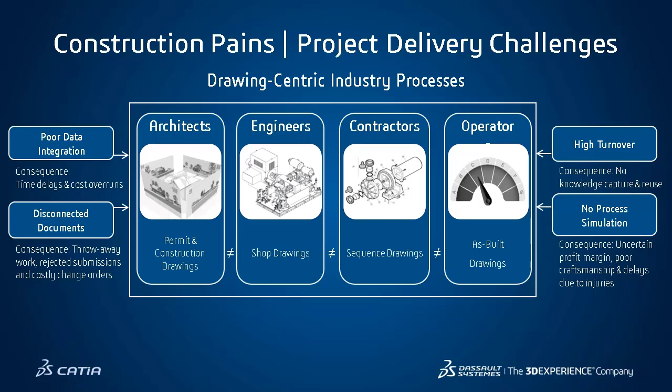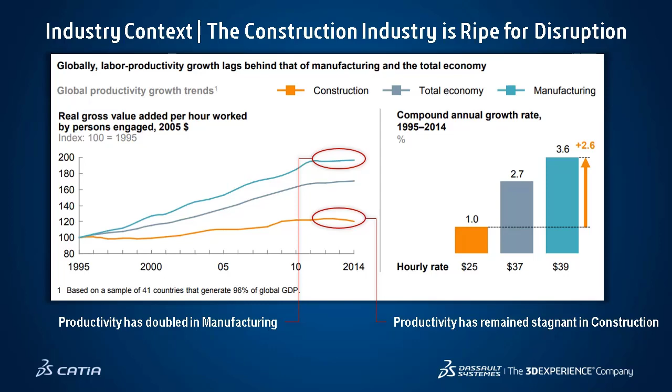Because of this, the construction industry has lagged in productivity gains over the past 20, 30 years, as the manufacturing industry has really taken advantage of the gains that you can make with automation and a 3D design process. The construction industry hasn't made that leap, and so there's a desire now, and there's a motivation to move into a more manufacturing-centric approach for construction, so that we can recoup those gains and start to make more progress.

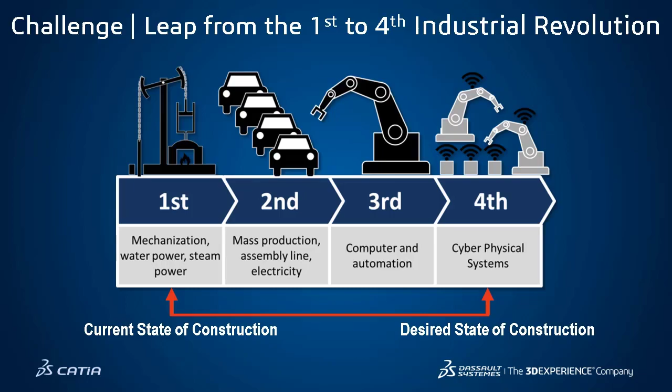And so the challenge now is to go from what I would claim the current state of construction, which is still in the very first industrial revolution of mechanization, through mass production into computer automation and eventually into cyber-physical systems, where the entire chain of construction, the entire chain of fabrication, assembly, installation can follow an automated path.

And CATIA has led this transformation in other industries. In 1981, we brought 3D design to the aerospace industry, while most architects and engineers were still drafting in 2D. And over the course of time, we've continued to deliver innovations to these industries, and the architecture, engineering, construction industry has made piecemeal improvements over time, but those remain very outlier examples.

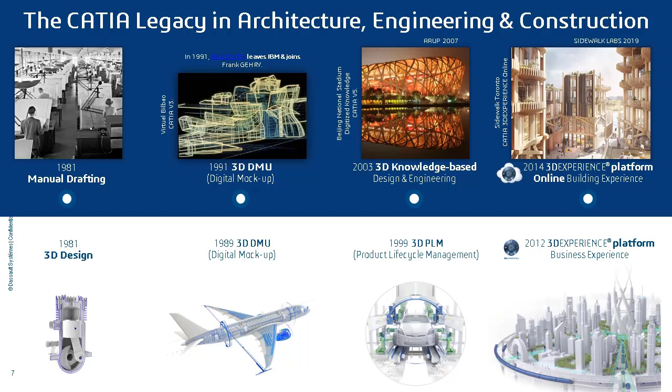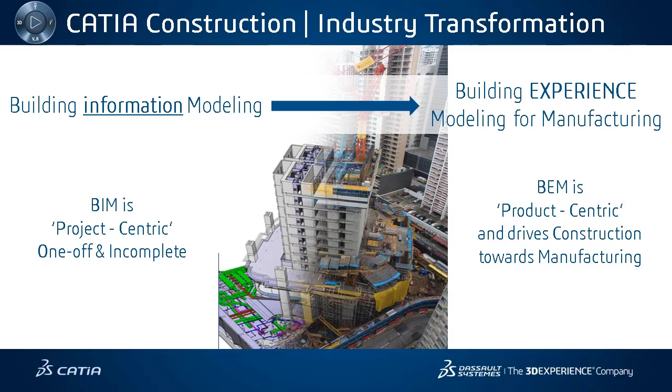And where we're going now into the future is to say that it's time to make that leap, the way the aerospace industry made the leap, the way the automotive industry made the leap. And we're proposing to go beyond the current paradigm of building information modeling into the future paradigm of building experience modeling for manufacturing, where through the use of parametric design, generative design, and template capture and reuse, we're going to bring the efficiencies found in the manufacturing processes to the construction industry.

So where do we see this going? The transition from BIM to BEM, going from fragmented processes, files and documents, manual reporting, 2D planning, into a platform-centric approach with a common data environment within the context of the city to maximize knowledge capture and reuse.

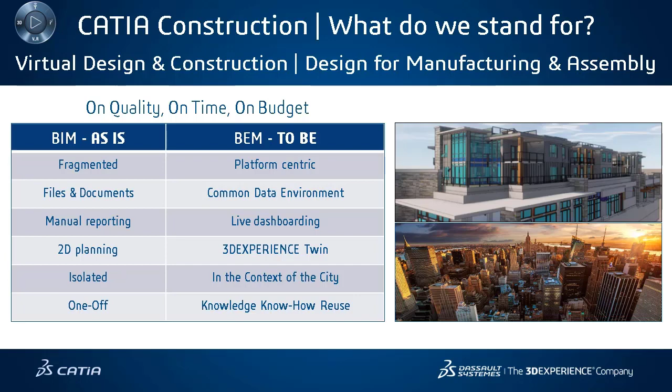And what's the difference between BIM and BEM? Well, BIM is a limited approach because it doesn't have the capacity to integrate a fully clarified, integrated systems view of a building component, of a building project. With BIM, we have an operational view, maybe a functional view, but the manufactured view, the organic view of all the different parts and pieces that go into making up that system is what's lacking. So with the power of the 3DEXPERIENCE platform, that's where we see this integrated systems view being deployed.

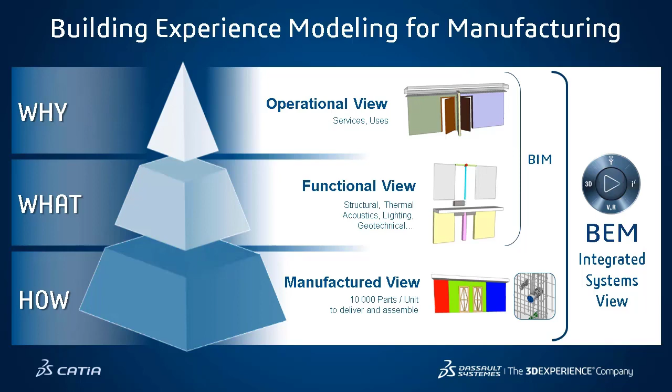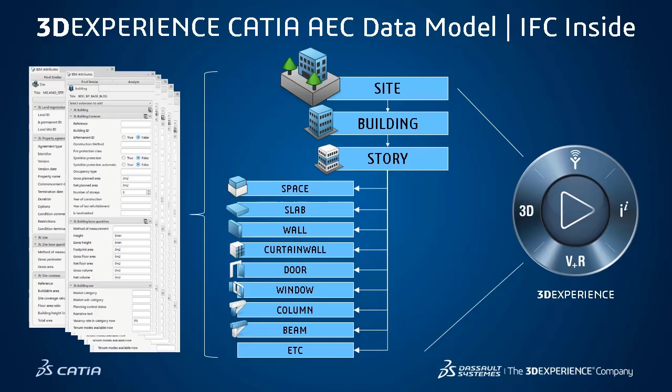And because it's on the 3DEXPERIENCE platform, it's available to everybody, sharing one common data model and one collaborative environment. That data model for us, for the construction industry, is IFC. It is interoperable. It functions across all of our applications, and it's able to deliver that industry specificity to the construction industry on the 3DEXPERIENCE platform.

So for CATIA specifically, we have a portfolio of roles, and those roles are focused on delivering a continuous level of development so that designers who don't need a high level of detail can be working in a conceptual model, but that model can be directly linked with the manufactured components and the highly detailed models that include all the information required for fabrication with the click of a button.

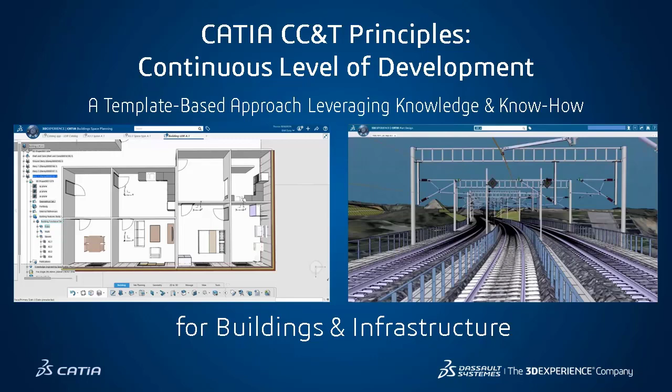And we have two focuses, one on buildings, one on infrastructure. Today I'm going to focus mostly on buildings, but if you'd like more information about our solutions for infrastructure, reach out and we can provide any information that you'd like. So just quickly, an overview of the role portfolio, because it's changed in the last 2 months.

What you see here is the new 21X role portfolio. Prior to this, it was similar but slightly different. Roles are commercial packages of applications. So it's what a user buys, it's what a user uses to deliver a construction project. And we have a portfolio of roles that go from architecture and buildings to infrastructure for roads and rails and civil infrastructure projects. And a dedicated portion for systems, mechanical, electrical, plumbing, and fire, and coordination and presentation.

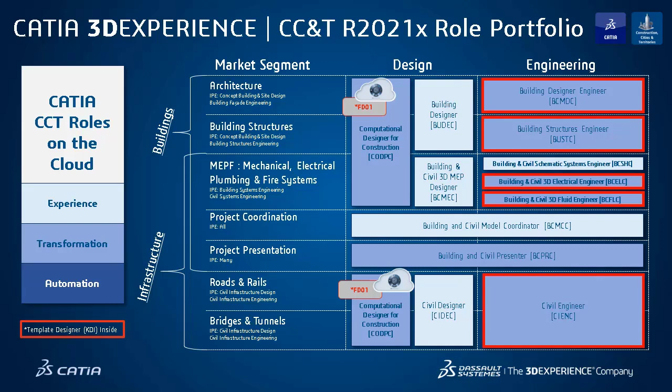These roles are then grouped to deliver processes. These processes are something that a department within a company is going to do, and those processes then make up what we call an industry solution experience. This is a look at creative building design and the processes and roles within that solution: civil infrastructure engineering, integrated built environment, and then the global portfolio of industry solution experiences for the construction, cities and territories industry in 2020.

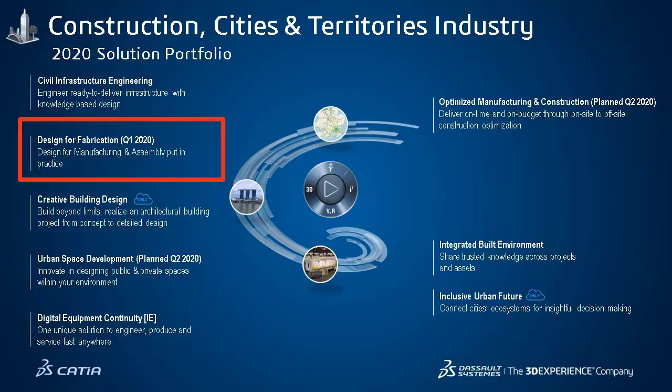We're going to focus on design for fabrication as we look at how and why we're delivering generative design for modular construction. In this case, we're going to look at a partnership that was signed recently with AIDEN. AIDEN is a global facilities management group that's headquartered in Shanghai. And we're working with them to develop something called a KillaCare, which is an innovative solution to deliver turnkey construction projects. And what we're going to show here is the result of the COVID crisis and how the urgent need for hospital beds in China has pushed AIDEN to develop this system to deliver smart and connected hospital beds.

What I'm going to show here is really the proof of concept that kicked it all off and led us down the path to develop this system, which is going to go beyond the COVID crisis. It's going to extend into other countries around the world to deliver not just hospitals, but other construction projects for all different kinds of uses. And so the business benefits here are to reduce delivery time, to reduce errors and costs, to meet the local government standards, to optimize the human environment and to maximize operational efficiencies.

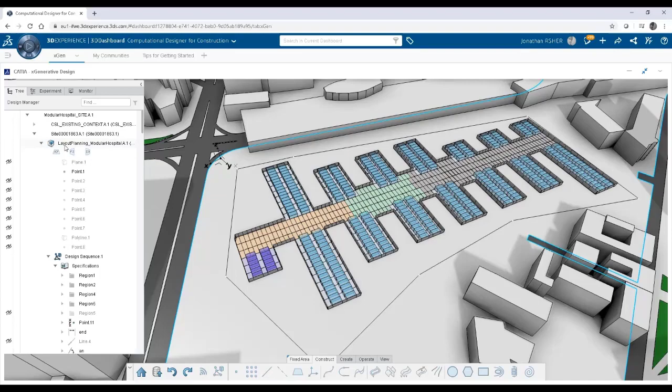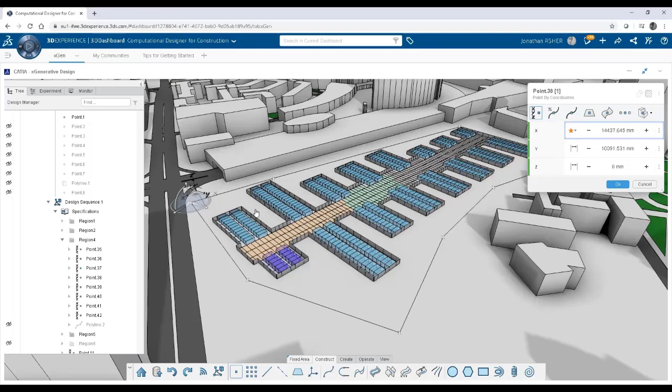xGenerative Design is a web application that runs on the 3D Experience dashboard. And here we've developed an intelligent generative algorithm to do space planning and to lay out hospital beds based on a site condition. So in this case, we have a site boundary. That's the maximum buildable site. We've laid out our units, and by manipulating the boundary conditions and a number of parameters that we've established as important driving parameters, we can modify the layout and see how the resulting spaces match the requirements for the project that we're going to be building.

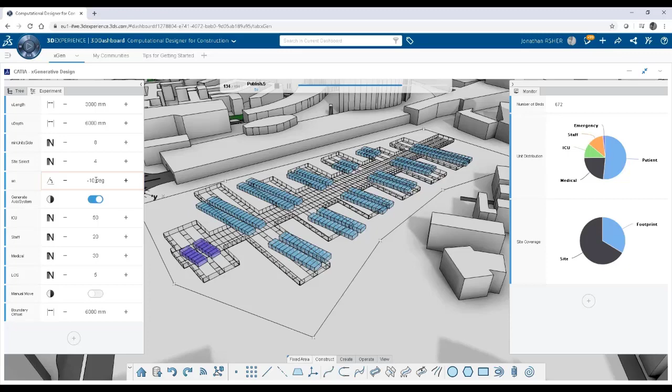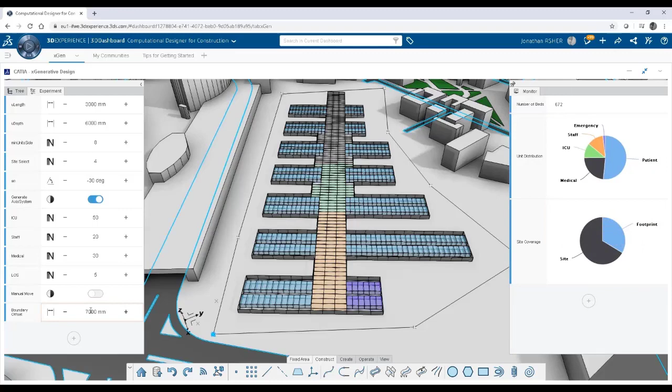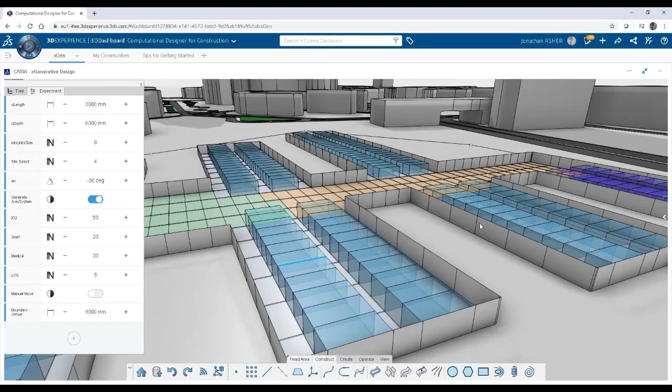And so some examples of the parameters that we've decided to manipulate to control our model, say the angle here. We have the offset, the maximum offset of the boundary. We have the different distribution of spaces. So what is the distribution of staff rooms versus medical rooms? And the resulting KPIs of each of our design variations are being captured in the monitors tab. The monitors tab you saw flashing over on the right-hand side. That's an interactive and dynamic tab that is displaying information that's being computed in our model.

And so as we modify our design, that data is being pushed back and giving immediate feedback to the designer of what's happening. So that's the generative space planning aspect of this project, and it serves as a way to do an initial layout of the project and to see what is the design potential of a given site.

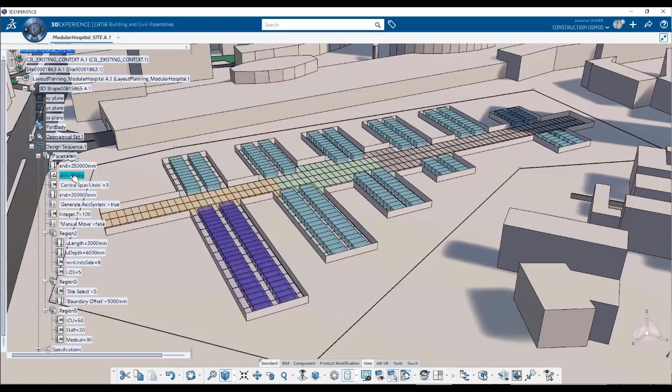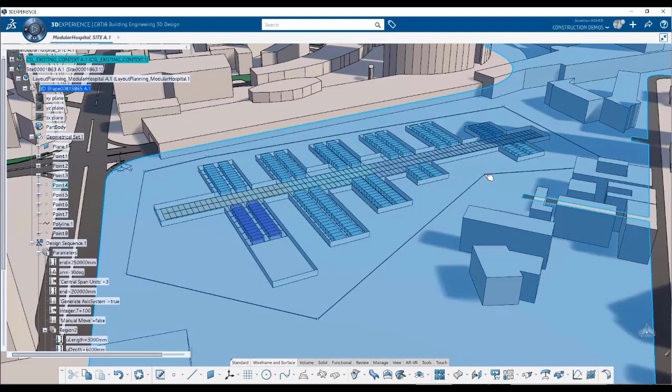But we don't end there because that model can then be brought into what we call the rich client. The rich client is the CATIA application that you download from the cloud. You install it on your local machine, so it's not running on the web anymore. But it's completely compatible with any of the models that have been created in the web client, in the web app.

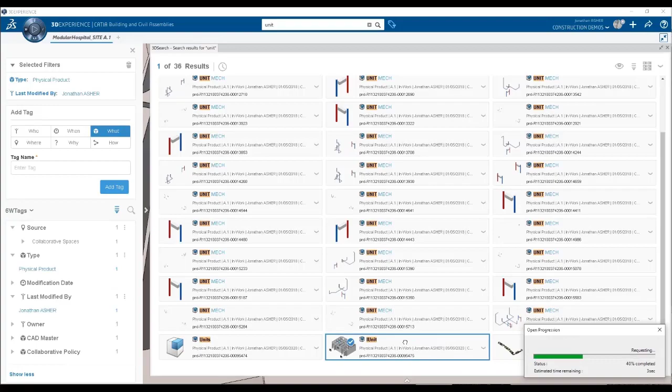So we've opened up our space planning model, our generative space planning model, and we're going to also open up a detailed hospital unit. So this is a unit that contains 2 beds and a central lavatory and washroom. This unit is inserted into our space planning model, and then it's constrained into place.

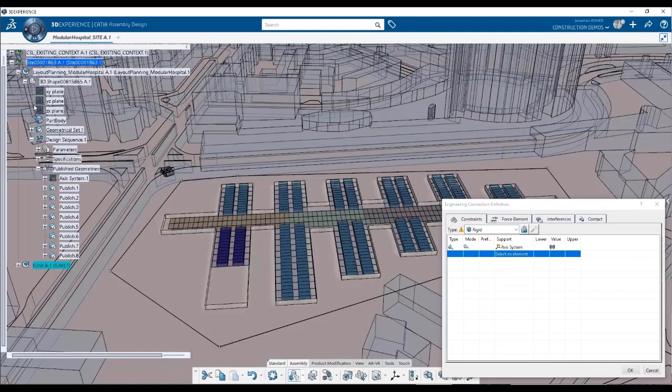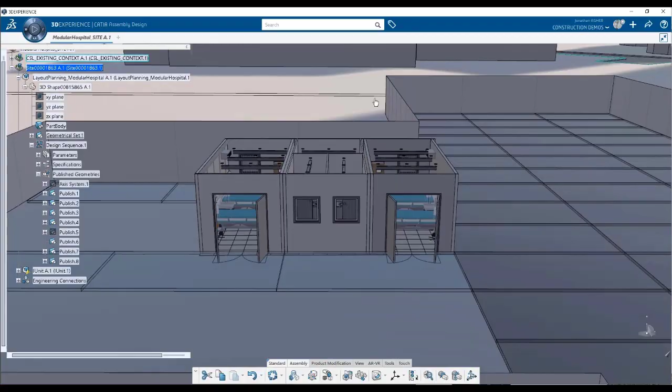So we're going to move this unit into place and then replicate that unit to all of our similar hospital units. So in this way, we're adding a level of detail. We're adding this intelligent and more detailed unit to our space planning model. Here we see it within its context, its first context.

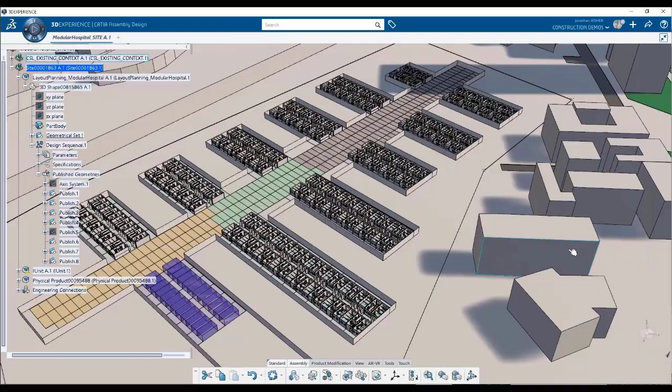And now by assembly patterning this around the building, here we see a preview. That unit is replicated everywhere. And so now we have all of our units, all of our modules in place. And here at this point, we can pull off the bill of materials. We have the number of doors, number of beds. All of that information is accessible to us, and it remains generative.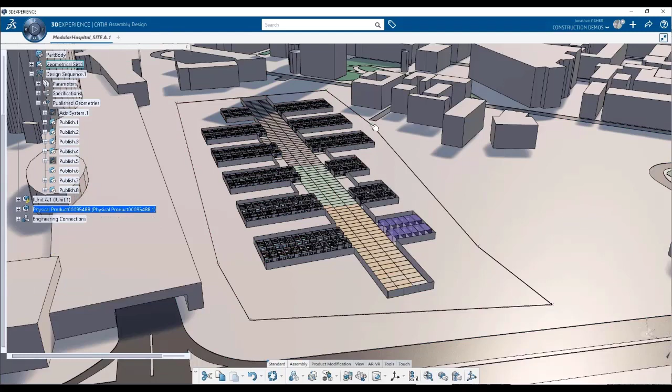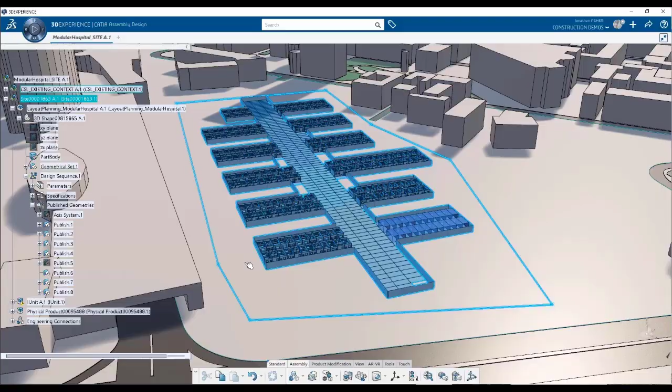So as we go and we manipulate the boundary, our site boundaries now, we see that we're not just updating the space planning model, but we're also updating our detailed units. And so this is the link. This shows the link between a concept model and a more detailed model.

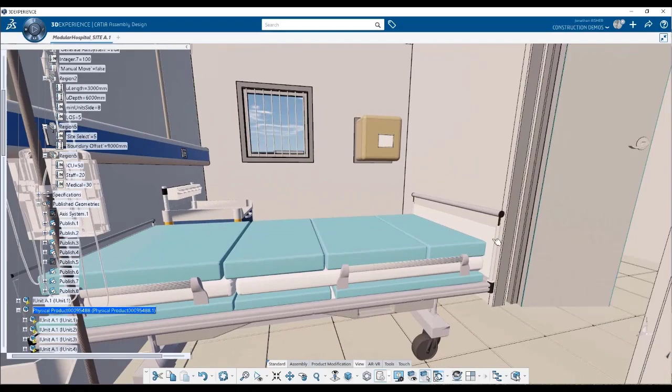But this isn't really enough because this component right here, we don't have enough information to really manufacture from it. We have a bill of material. We have more detailed information about each space, but now we need to start to frame these walls and go into the manufacturing portion.

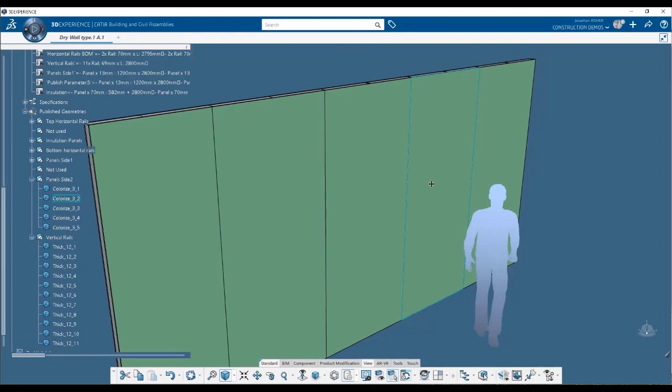So we have right here a generative wall component, a generative framed unit, and that wall component is composed of some cold formed studs, top and bottom tracks, some insulation panels, and then the drywall or whatever covering panel you like. We see that by modifying the parameters, we're updating that model. So it's a generative model.

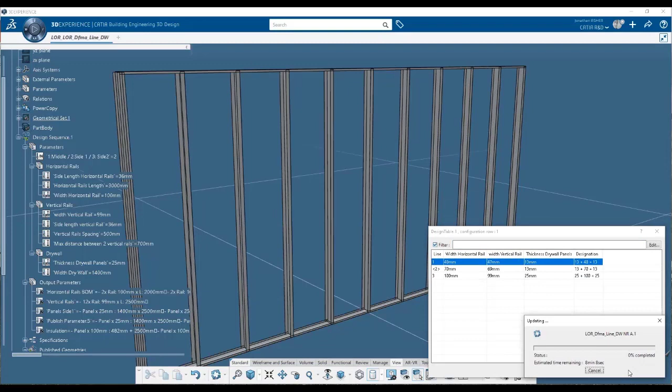But what's really important to note is that it's also configurable. So by changing one of these configuration settings, we can modify the parameters of all of these units. So with that, we're going to insert this detailed framed wall into our model here. And we do that by defining a specification. So we have a low level of detail wall, which is represented by a volume.

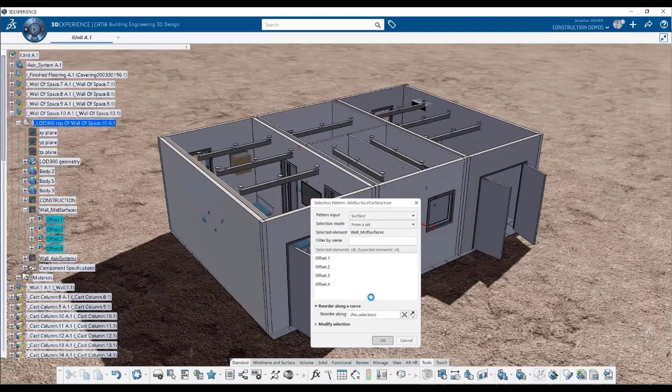By associating this wall template to those wall volumes, we're going to be able to very easily and quickly instantiate that detailed wall into this model, and from that wall model, we're going to extract the required information for fabrication. So again, all of those parameters and configuration settings are accessible through this specification. And when we come back to our context model, we can run what's called change level of development.

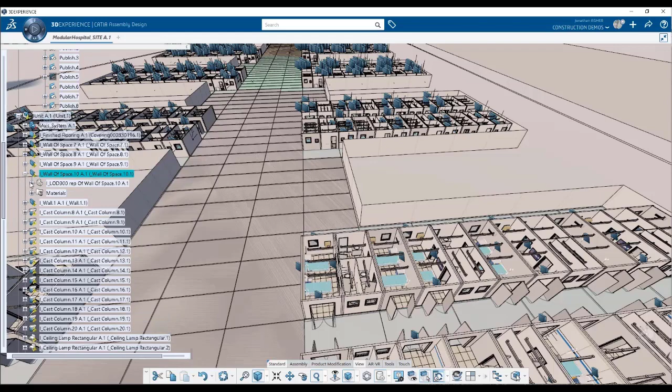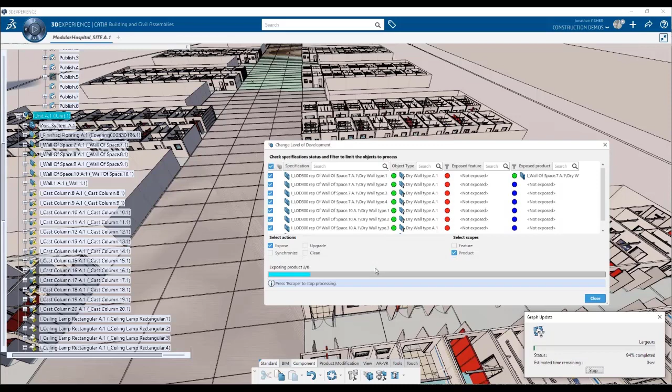Change level of development is now going to take that simple volumetric model of the wall, and it's going to insert the detailed component in place of that volume. So here you see we're going to instantiate those panels. Now the walls are being inserted into our model. In this case, we've inserted 8 walls, 4 for each of the sleeping areas of that hospital module.

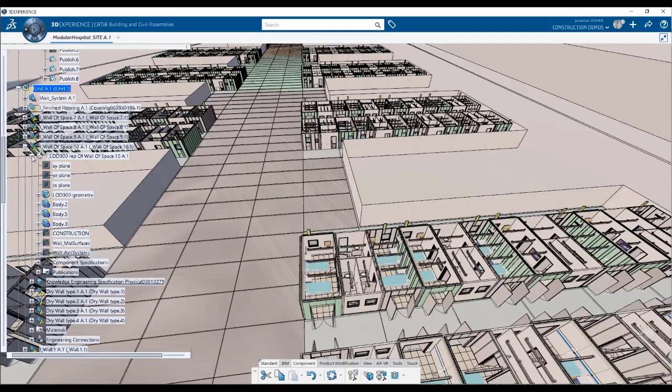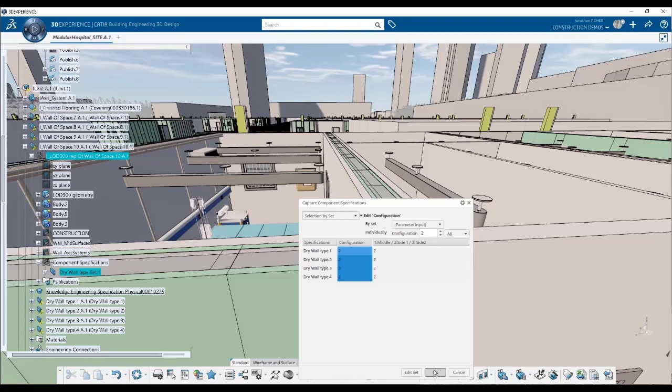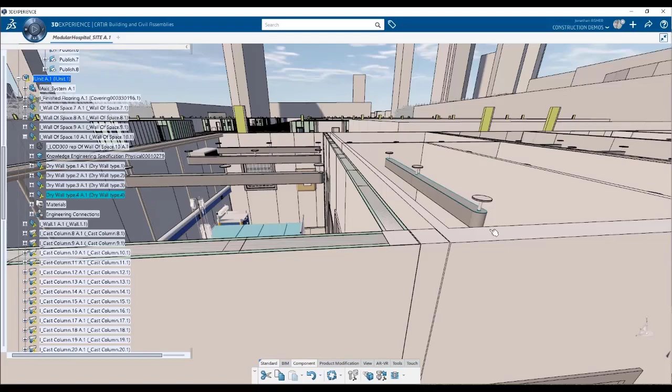And there you see they've been inserted into the model, but as with most things in life, it's not quite right the first time. So we need to go back in here and modify the configuration that has been inserted into the model. You see that the alignment here is off. It's not centered on the wall. So we're going to go back into our change level of development command and synchronize the changes that we made. And now you see that those walls have been modified to sit flush within the center of the walls.

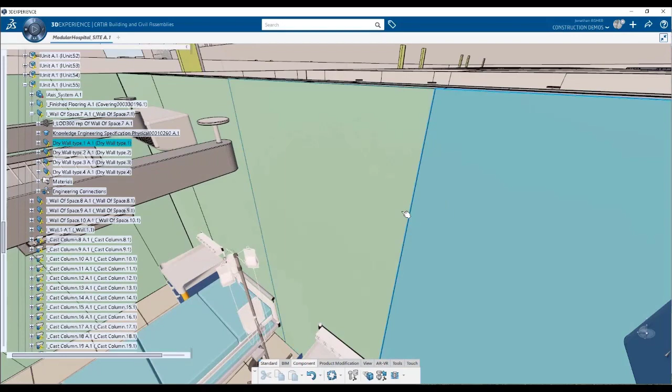And to show the power of the generative aspect of these walls, you saw the original wall didn't have any openings in it, but now these newly inserted walls have taken into account where the doors are, and they've updated their framing to frame around those doors.

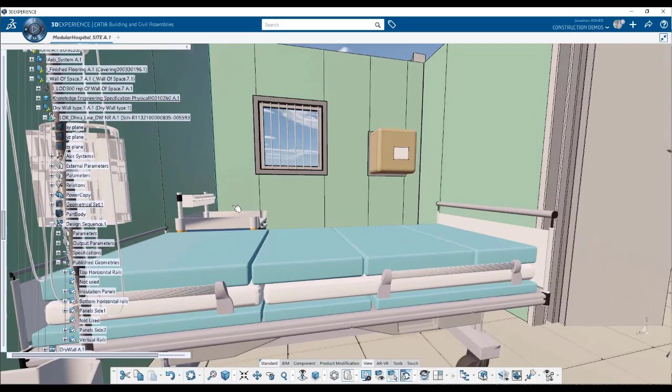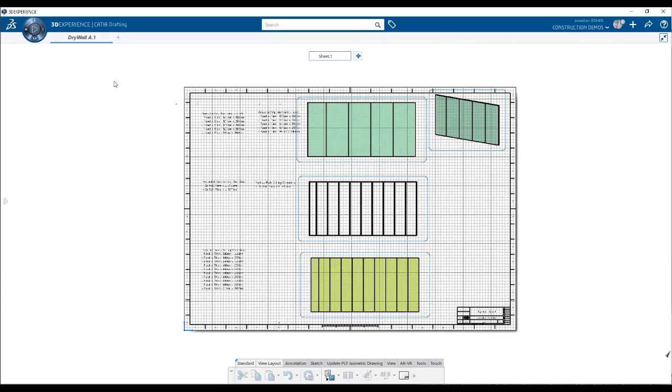And more than just that, each one of these walls brings along with it a drawing that's used for assembly requirements, and again for bill of materials, and further to be used for fabrication. So when we run the update, we see here's the updated drawing for that wall. That includes all the information about each one of the units, each one of the parts and pieces.

And an example of a wall with a door. You see we update this model and we have a couple of doors here. We've got the framing layout for that and a detailed bill of materials.

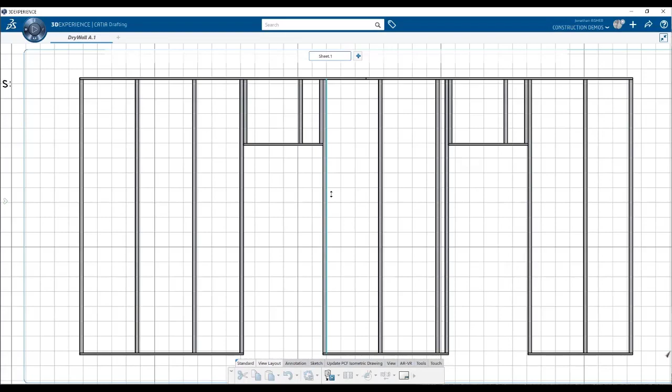So what's really exciting about this, and what's the true benefit of an approach like this, is that you're able to link a concept design with a detailed design, all in a seamless approach to go from a generative model to a fabrication model on the same platform with the same set of industry processes, all contributing to one solution. And we're really excited to see where this goes with Aiden and our Aquila project.